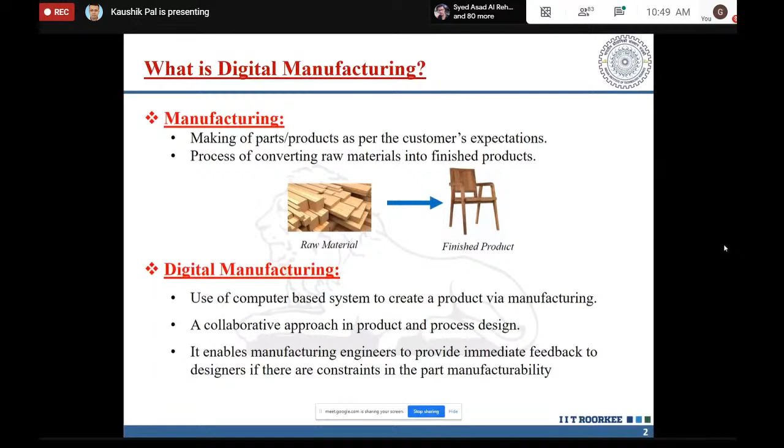So now what digital manufacturing allows for: first is shortening of the development time and cost. Yes, because when you have human interventions, there is a chance of error, since in industry generally after 8 or maybe 10 hours we change the operators, and all operators don't have the same capability or the same patience.

So after a certain time they may get exhausted and some error may occur, maybe in measuring length, height, width, or something like that. So there is a chance of error at every step, but when one machine is doing all these things, it performs that duty very properly, and after certain time it will never get exhausted.

So what will happen if it is finding any kind of drawbacks? Simple, it will give input to the operators that there is a certain problem, then human intervention will come into the area, look, rectify it, and then again the machine will perform the same thing.

So automatically it is reducing the time, and of course reducing the cost too, because at the initial stage when you are installing these machines, it is very costly and expensive, but that machine can work for 5 years or 10 years. If you calculate the cost of your operator for 5 or 10 years, you will see the profit is there when using digital manufacturing rather than employing so many operators.

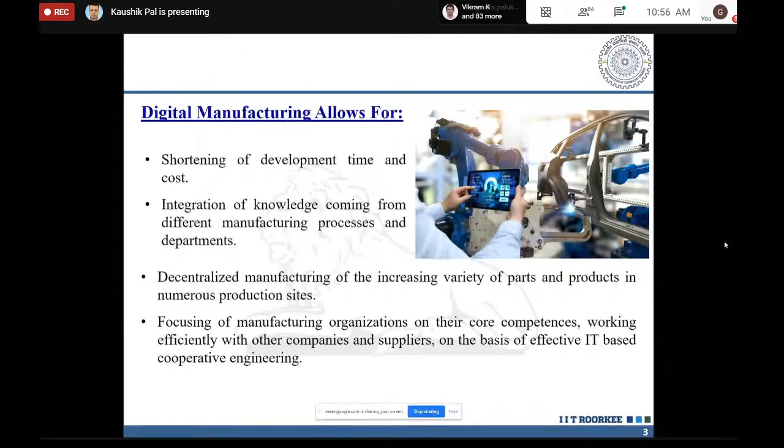Now, what are the basic components of digital manufacturing? There are several components available. First is CAD, which is nothing but computer aided design.

Basically, you are making any kind of design through software - AutoCAD, or there are n number of others like CATIA, AutoCAD. Nowadays MATLAB is booming too. So many types of software are available in the market, and you make the whole design.

Nowadays you have probably heard about 3D printers too. Earlier, it was only available for polymer kind of things, but nowadays it's available for metal kind of things also - metal 3D printers have already come into the market.

So now you can understand - suppose you are making a design, doing some kind of programming, and automatically that 3D printer will print that particular part. You simply take it out and put it in place. Now you can understand how automation, artificial intelligence and machine learning have come very close to us, and how helpful they are to us.

Next is CAM, computer aided manufacturing. Then CAPP, computer aided process planning, which we generally use in industry. You may have heard about Industry 3.0, Industry 4.0 - there are so many things.

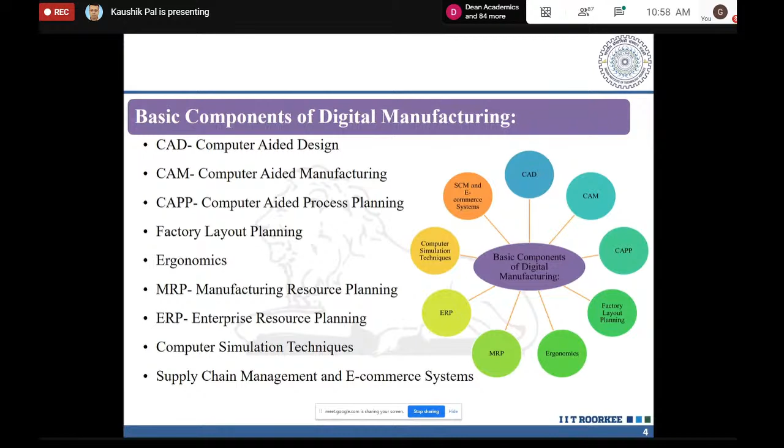Next, let us discuss CAD. From a mechanical point of view, we know what CAD, or computer-aided design, is. But for your remembrance, I am telling you: it is the use of computers to aid in the creation, modification, analysis, and optimization of a design.

CAD is not only about designing something new. Suppose you have any existing products - you can also replicate them in your software, then analyze the life of that product, find where the problem is if some portion has worn out or broken, and easily rectify those problems, repair and resolve them, and use that part for the future too. No need to throw it out.

So CAD software is used to increase the productivity of the designer, improve the quality of design, improve communications through documentation, and create a database for manufacturing.

Yes, of course. Earlier days also we are facing certain problems, and nowadays also so many. Suppose if you are going to any shops, I can give you examples. Suppose you are going to any shops, or maybe any industry, or something like that, or maybe some restaurant. So everybody has faced this problem.

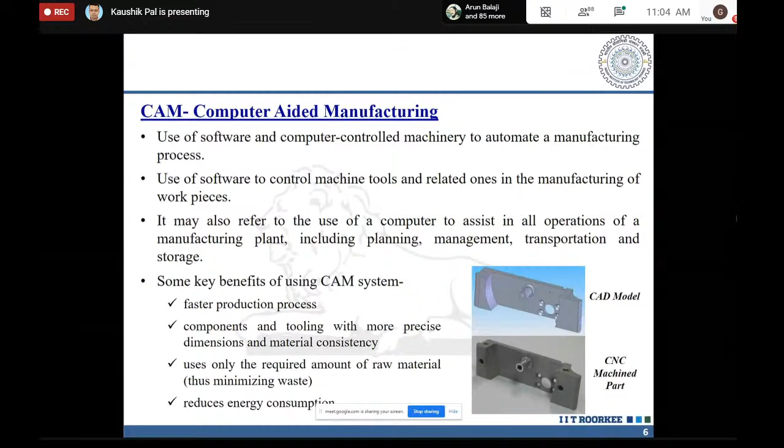So what will happen in that particular case? Just a minute, what is happening?

Okay, so what is there? Let me explain.

CAM is basically the components and tooling with more precise dimensions and material consistency. It continuously makes the same component several times, using only the required amount of raw material. Manually, we don't know how much material is required, or when welding, we may deposit more material than needed, causing wastage. This reduces energy consumption.

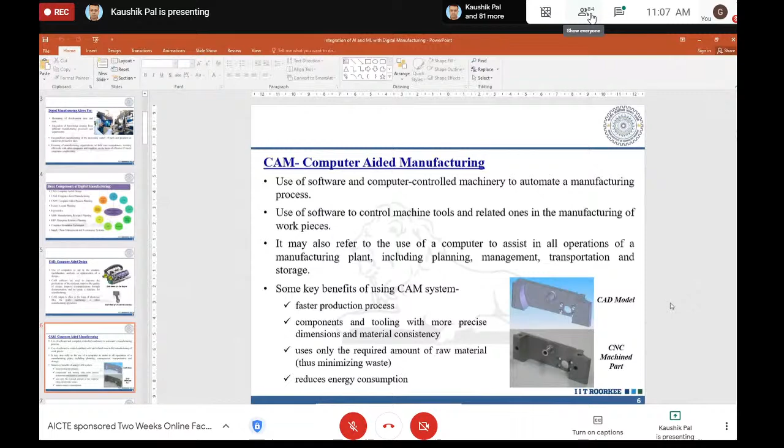It automatically controls your input parameters. Suppose in some cases you don't need that much heat or temperature, so automatically it will cool it down. Or in some cases it needs more load or more pressure, so automatically it will comply with all these things. These are all the beauty of digital manufacturing.

Next is CAPP, computer-aided process planning - the use of computer technology to aid in the process planning of a part or product in manufacturing. CAPP is the link between CAD and CAM. It provides for the planning of the process to be used in producing a designed part, because for any process you need proper planning.

Due to that, it will automatically give you the time - if you go by this particular route, it takes this much time. This is like how GPS software works, like Google Maps, which gives you two or three types of options. If you go by this route there's some traffic and maybe a roadblock, it needs 4 hours. If you go by this route, it has faster traffic but has some tolls. All this kind of information.

The machine gives you the same kind of information - if you go by this method, it will take this much time, maybe this much complexity may occur. Based on that, you can choose your best option.

Then factory layout planning: design assembly lines, equipment and tool requirements in a 3D environment. It will not only tell you the fastest method, but also how to position your equipment, in which zone and where, so everything is nearer and easily reachable, without harming any other operations. Everything will be done continuously and finished.

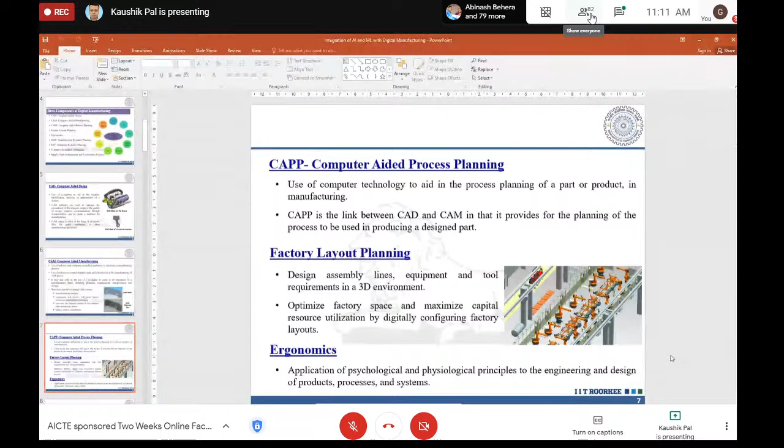So as I told already, when you are having some dead end, it will give you some solutions. Dead end means the machine will automatically give you the solutions. If you go by this way, you can be able to reach your goal, or you can do it like this. So automatically it will plan properly. It will tell you exactly that particular process by which you can gain.

And not only that, it will save the life of that particular equipment, because sometimes it may happen that some machines need constant monitoring. So you have to employ certain employees over there at that particular time who will look into those machines constantly. Say, suppose I can give you an example.

Suppose you are going for any kind of automotive industry, or maybe a bearing company. So they are making that product within a minute. After certain minutes or hours, you have to check the products, whether they are proper or not, if you do it manually. But when you are making it digitally, of course the checkpoint is there, but that checkpoint is also taken care of by your equipment itself.

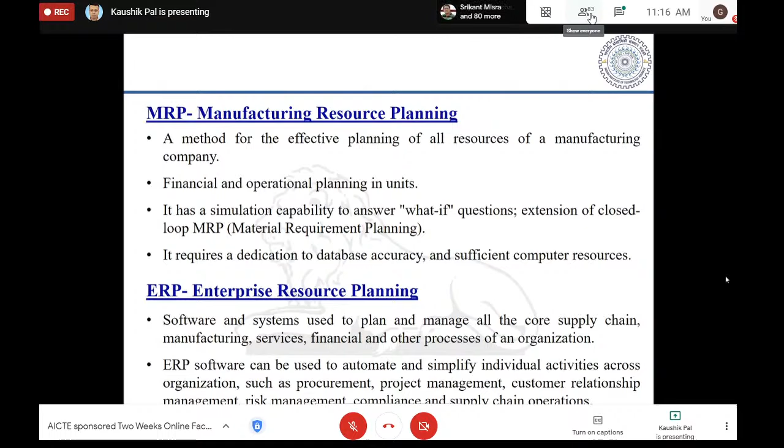Nowadays so many simulation tools have come. MATLAB is there, ANSYS is there. Suppose you are making one material and hitting it, raising the temperature and all these things. You have a metal bar and you give it a temperature of around 600, or maybe 1200, or 2000 degrees centigrade. After giving the temperature of 2000 degrees centigrade, how that particular material behaves is also given by our simulation techniques.

So in ANSYS, I put in all the parameters, setting the temperature around 2000 degrees centigrade. After 2000 degrees centigrade, whatever load or thermal stress is generated, how the metal will behave, how the temperature will be distributed inside the metal - everything will be given by that particular software.

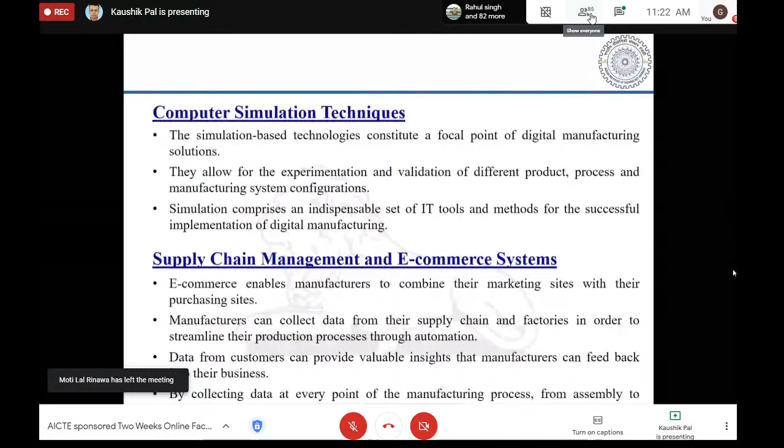I was giving the example of the 3D printer. Nowadays the 3D metal printer has also come into the market, but it is huge cost. If you are able to put it into your industry, you can automatically get the output. Then, along with machining and tooling information.

It reduces commissioning cost through simulations by validating robotics and automation. It helps in creating factory models faster and ensures they are operating under optimal layout, with material flow and throughput before production ramp up. Whatever I have explained to you, everything has been given point by point.

It supports Six Sigma. Nowadays Six Sigma has come, Lean Initiative has come, and green manufacturing, basically you can hear about the green composites or green manufacturing process. These are all things within a graphical environment to analyze dimensional variation. It facilitates the sharing of quality data across your organization by generating complete, verifiable CAD-based machine inspection programs for CMMs and NC machine tools. It executes production processes with real-time access to lifecycle data.

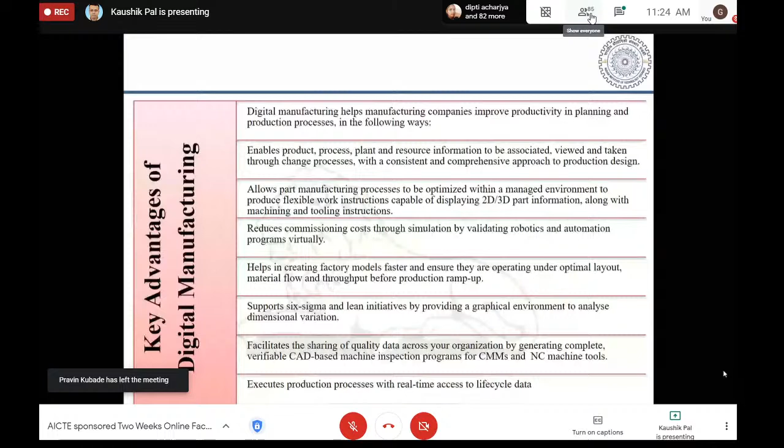So this is basically the whole key advantage we can get with digital manufacturing. Now, manufacturing equipment in DM, digital manufacturing. I can give you certain examples: first is numerical control and computer numerical control machine tools, automated welding machines, industrial robots, and coordinate measuring machines. I'll show you some examples, images, or videos, so you can understand how digital manufacturing is helping nowadays in our industry and in our day-to-day life.

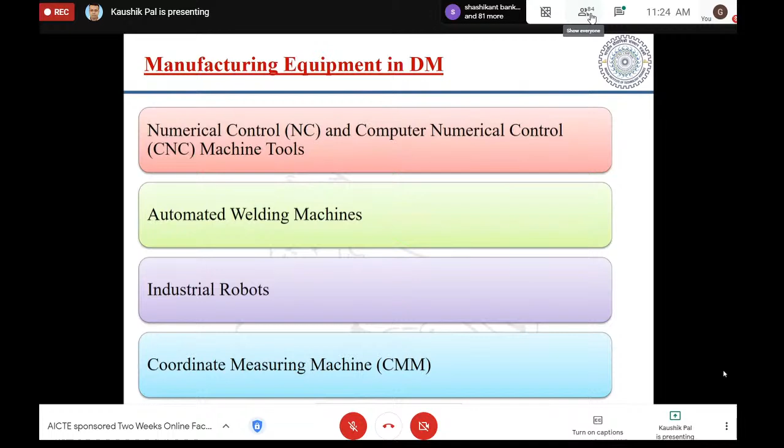First, when talking about numerical control, this is not a new technology, it was developed quite a long time back. Sometimes we call it computer numerical control or numerical control. NC-CNC is the automated control of machining tools such as drills, lathes, and mills. You do the programming and put it into your computer, which performs operations one by one. It will decide whether the drill, lathe, or mill is required, and you will get the final product.

Sometimes you have to tell it the steps also. A CNC machine processes a piece of material like metal, plastic, wood, ceramic, or composite to meet specifications by following coded programmed instructions. Earlier, we used certain kinds of chisels or a simple hacksaw, but nowadays everything is done by the machines themselves without a manual operator directly controlling the machining operations.

The program can be written by a person, or more often generated by CAD or CAM software. So the machine should be able to learn your language. For learning that language, you need certain software, because computer only understands 0 and 1, it doesn't know anything else. So I have to give it certain things the computer can understand, and this kind of software is the interface between your machines and human beings.

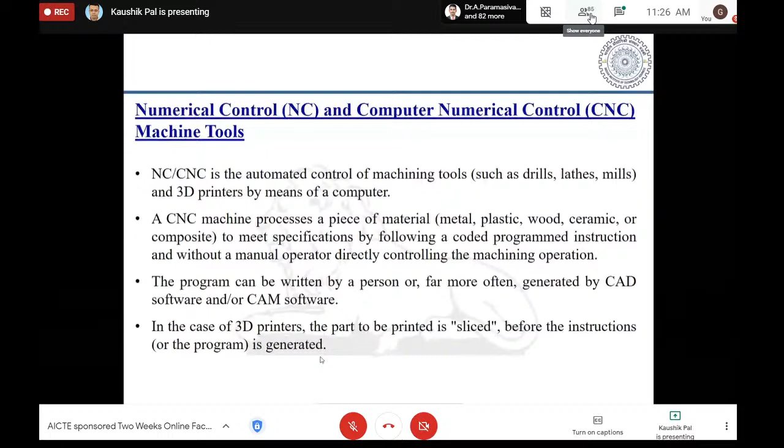In the case of 3D printers, the part to be printed is sliced before the instruction or program is generated. Sliced means you have to give some pause or break, so one process will be done and then it will move to the next process, stop, and then move to the third process. This is how the operations take place.

Now I can show you an example of how this machine works, basically the CNC lathe. So now everything has been given into the software, there is no manually operated process anymore.

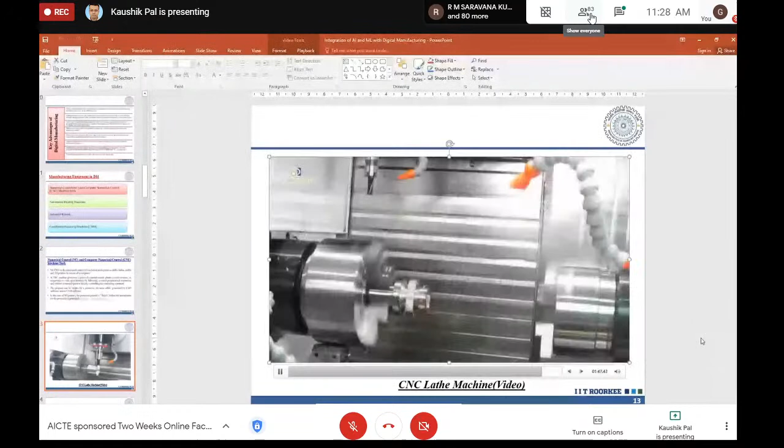Now you have seen how the machine performs these tasks. Similarly, we also have automated welding machines that help automate the welding process. It changes input parameters, heat, and if you are using consumable electrodes, after one finishes, it automatically loads a new electrode and continues the process. Sometimes it may not get continuous heat or pressure, in which case the machine automatically stops.

So that means you always have feedback from your machine. If you face any kind of obstacle along the way, feedback comes in, then you rectify the problem and proceed to the next step.

So many welds can be handled quite adequately by an automated welding process. Fully automatic welding removes the human element except as an overall observer to make sure the machines are running properly. That means you keep an eye to see whether all operations are okay. Suppose you want to weld 5 parts and previously needed 5 operators, now simply from a table you can observe how all the welding takes place without any operator.

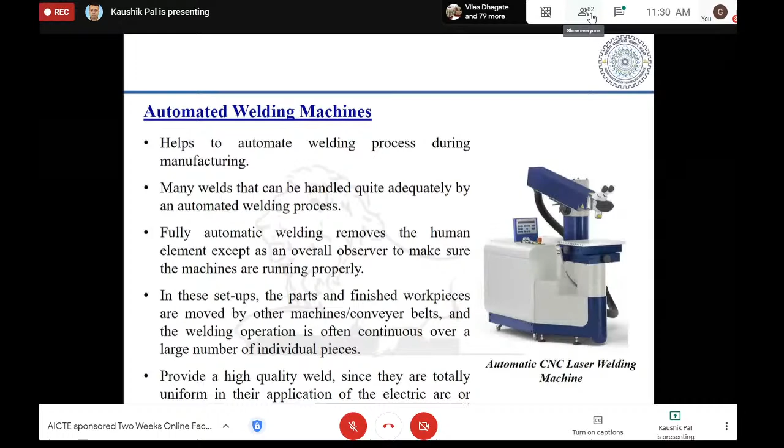Next, industrial robots. We generally see this kind of robot in movies or elsewhere, but nowadays they have come into the market. You cannot find any kind of operator there. Everything, including the computer monitor, is taken care of by the robots themselves, which is the interesting part. You give instructions only to one particular robot, and that robot gives instructions to all other robots, and the task gets done.

So maybe in the future we won't be surprised that a car is being made while you sit at home, with the entire company run by these kinds of robots, and your car gets dispatched, from flat sheet to final product. Who knows, maybe in the near future we can see all these kinds of things.

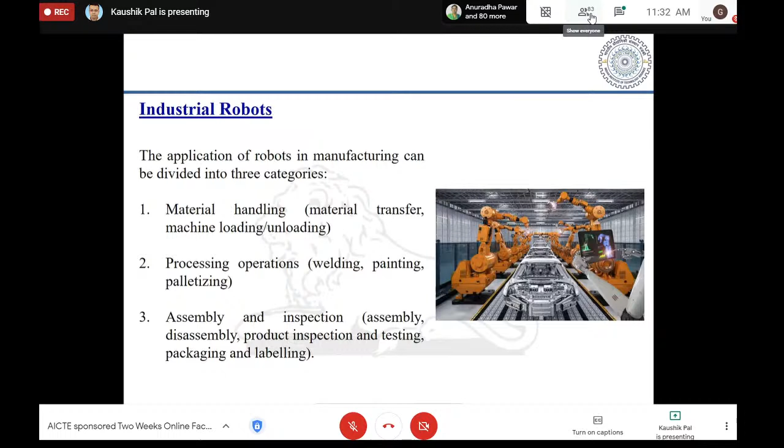The application of robots in manufacturing can be divided into 3 categories. First is material handling, like material transfer, machine loading and unloading. Second, processing operations like welding, painting, palletizing, assembly and inspections. Third, like assembly, disassembly, product inspections and testing, packaging and labeling.

Next is CMM, the coordinate measuring machine, which I was talking about. I've given you only a single example, but there are numerous examples by which you can check your parts. You can check height, surface properties, textures, width or dimensions, and measure surface roughness. Everything can be measured, including whether any hole you make has a uniform diameter or not.

A coordinate measuring machine is a device that measures the geometry of physical objects by sensing discrete points on the surface of the object with a probe. Various types of probes are used in CMMs, including mechanical, optical, laser, and white light.

Depending on the machine, the probe position may be manually controlled by an operator or it may be computer controlled. So that means basically everything you are controlling by sitting at the computer.

I can give you another example. Suppose you are traveling and going to the airport. You are keeping your bags on the scanner. The scanner belt is continuously moving, and only a single person is sitting over there. What is he doing? He is seeing what is there inside your bags.

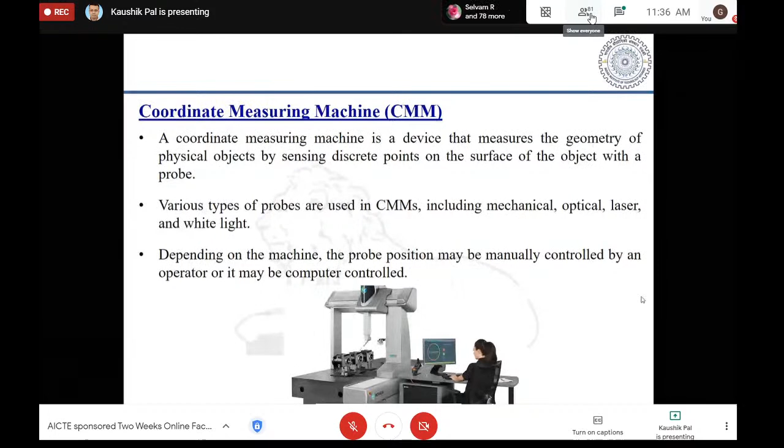If something is wrong, then only the human intervention will come. So now everything has been digitized, and manual intervention has been reduced. Our planning is to reduce this manual intervention as much as we can. But of course, that has some pros and cons, which I am going to talk about in tomorrow's lecture.

Next, basic introduction of artificial intelligence. Now let's come to artificial intelligence. Till now we were talking about digital manufacturing. Artificial intelligence as an academic discipline was founded in 1956. Now you can understand it is not so new.

The goal then as now was to get computers to perform tasks regarded as uniquely human things that required intelligence. That means till now the computer was working depending upon your input parameters. If you say go, then go. If you say no, that means no. But now when I am talking about artificial intelligence, that means the computer has brains. It can take its own decisions. If this path fails, automatically it will take another path and achieve the goal. So it's basically like the mimicry or cloning of the human brain.

Computers emulate the human thought process. AI means getting a computer to mimic human behavior in some way. The computer is doing something intelligent, so it's exhibiting intelligence that is artificial. Yes, of course, that is the artificial thing.

So the earlier use of AI was in image recognition. You can understand this with Google nowadays. Suppose if you use certain Apple products, say an iPad or an Apple MacBook, there is a Face ID feature. Unless you click on Face ID, at the first instance it will click your face image and it will be digitally saved. Every time you open it, it will take your face image, match it, and then it will open. If it is handled by some other person, it will never open. So that means the image recognition kind of thing has already taken place.

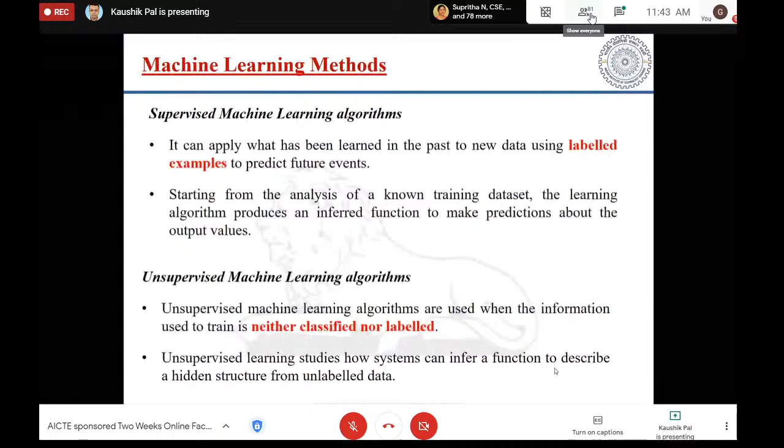Unsupervised machine learning algorithms are used when the information used to train is neither classified nor labeled. Unsupervised learning studies how systems can infer a function to describe a hidden structure from unlabeled data.

Then semi-supervised machine learning algorithms fall somewhere in between supervised and unsupervised - using both labeled and unlabeled data. It typically uses a small amount of labeled data and a large amount of unlabeled data.

So it is a mixture of things. Then reinforcement learning means you are putting a third party into the system. Reinforcement machine learning is a method that interacts with its environment by producing actions and discovers errors or rewards. Trial and error search and delayed reward are the most relevant characteristics of reinforcement learning. It allows machines and software agents to automatically determine the ideal behavior in a specific context in order to maximize its performance.

Some common applications of AI include personalized coupons or product suggestions we receive after shopping online, AI-based self-parking or self-driving cars like Tesla. If you know about Tesla cars, they automatically take their own decisions about traffic, where to stop, and what the speed should be in traffic. Other examples include virtual assistants like Siri and Alexa, social media news feeds, chatbots, trading and investment, and traffic management, etc.

Now, what is the role of artificial intelligence in general? Artificial intelligence in modern terms generally refers to computer systems that mimic human cognitive functions. It encompasses independent learning and problem solving. Most contemporary artificial intelligence projects are currently better understood as types of machine learning algorithms.

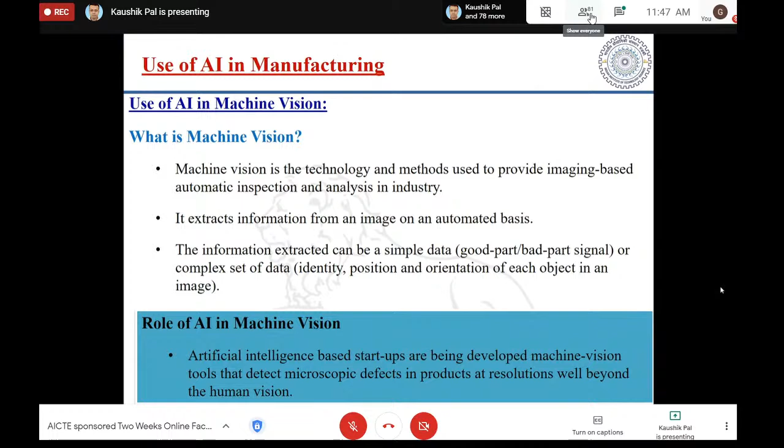Role of AI in machine vision: artificial intelligence-based startups are developing machine vision tools that detect microscopic defects in products at resolutions well beyond human vision, meaning defects we cannot see with our naked eyes, but which can be seen by computers or machines. This helps save costs for the future, because when faulty parts are put in, problems may occur later. So by using this computer or machine vision, you are diminishing those particular errors or losses.

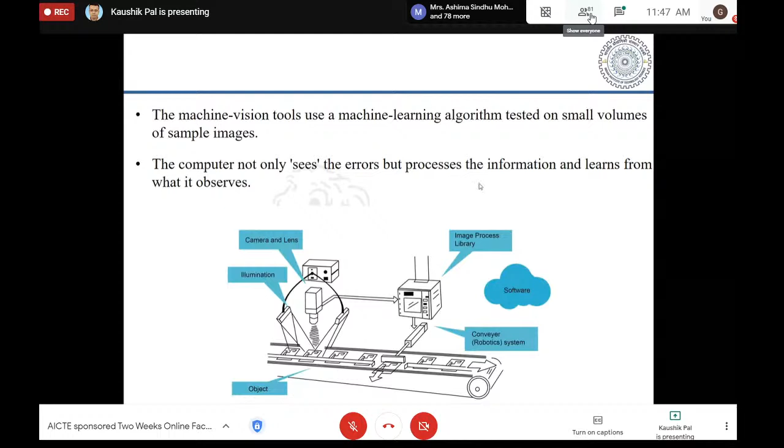The machine vision tools use a machine learning algorithm tested on small volumes of sample images. The computer not only sees the errors but processes the information and learns from what it observes.

Then there's automation in manufacturing with the use of AI. In 2014, China, Japan, the United States, the Republic of Korea, and Germany together contributed 70% of the total sales volume of robots, so everything is automated. In the automotive industry, a sector with a particularly high degree of automation, Japan had the highest density of industrial robots in the world at 1414 per 10,000 employees. Now you can understand, even though employees are there, they are still using robots just to minimize human intervention and errors.

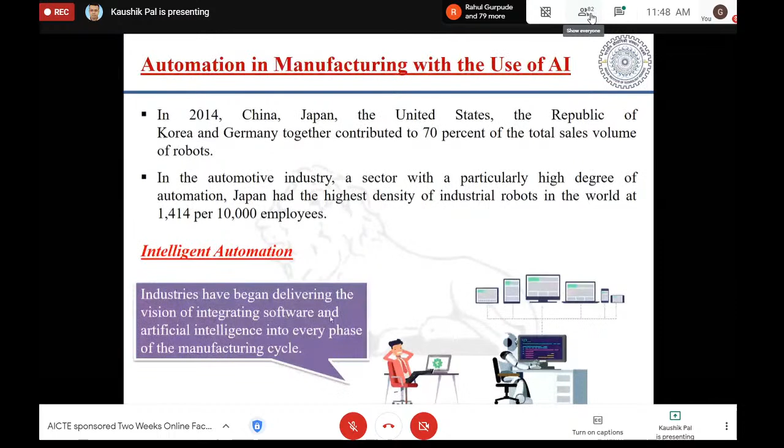Industries have begun delivering the vision of integrating software and artificial intelligence into every phase of the manufacturing cycle. This includes the generative design approach in manufacturing, where designers or engineers specify design goals as well as material parameters, manufacturing methods, and cost constraints.

I have already explained this in detail, so I'm not going into the details once more.

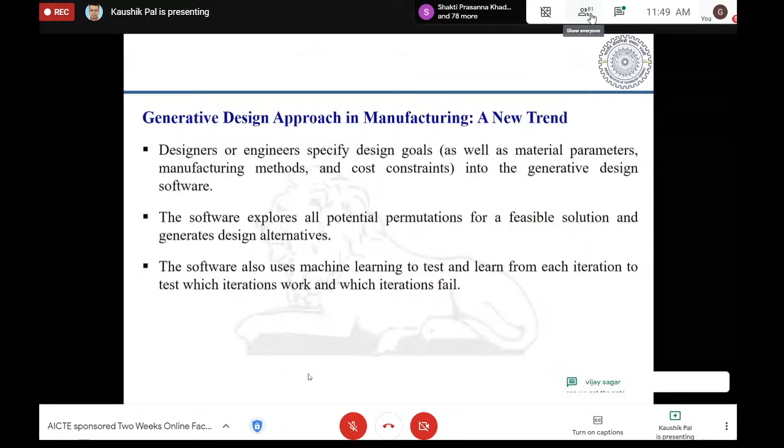Into the generative design software: the software explores all potential permutations for a feasible solution and generates design alternatives. The software also uses machine learning to test and learn how each iteration performs, across however many cycles, so it is taking the final call. It's not going for a single one, there are so many iterations. Only after that will it give you the final result, showing which iterations work and which iterations fail.

AI and ML in robotics. Artificial intelligence is set to disrupt practically every industry imaginable, and industrial robots are no different. The powerful combination of robotics and AI or machine learning is opening the door to entirely new automation possibilities. These are all things we are seeing in so many videos and movies.

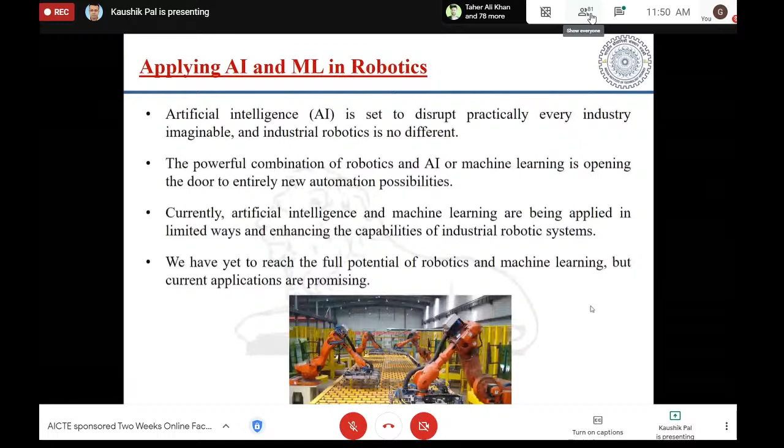Currently, artificial intelligence and machine learning are being applied in limited ways, enhancing the capabilities of industrial robotic systems. We have yet to reach the full potential. We have not totally changed into robotic systems. So now we are in a phase in between, with 50% human intervention and 50% robot. But current applications are promising.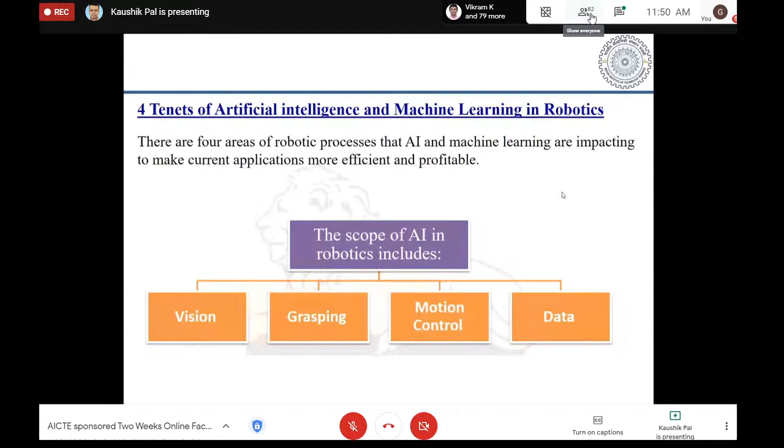Now, the tenets of artificial intelligence and machine learning in robotics. There are 4 areas of the robotics process that AI and machine learning are impacting to make current applications more efficient: vision, grasping, motion control, and data. In these 4 zones, AI and machine learning are boosting the robotic process.

What is vision? AI is helping robots detect items they have never seen before and recognize objects with far greater detail. In some foreign countries, for the immigration process, you no longer need to show your passport. There's just a machine with cameras, no persons. You put your eyes over there, it scans your retina, and if it matches the data, the door opens automatically. If there's a problem with your data, the gate will never open.

So that's vision. Then grasping. Robots are also grasping items they have never seen before with AI and machine learning. Simply, use the camera in your mobile phone. When you take a new picture, nothing happens, but if you already took a picture of a person, say your kids or your spouse, and you try to take the same person's picture again, you'll see a square box appear.

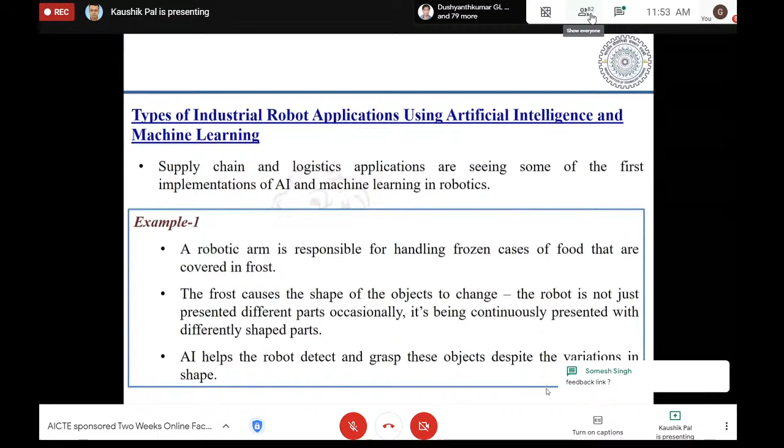The frost causes the shape of the objects to change. The robot is not just presented with different parts occasionally, it is continuously presented with differently shaped parts. AI helps the robot detect and grasp these objects despite the variations in shape.

Example 2: picking and placing a large volume, which is not possible by humans, of different part types in a warehouse. This volume of part types would not be profitable to automate without machine learning. But now engineers can regularly feed robots images of new parts, and the robot can then successfully grasp these part types.

They take those images and store them inside. When a new item comes in, they first match it against the stored data. If matching is successful, they can perform the same task. If matching is not successful, then you have to feed that particular data again, and this way increase the database of that particular equipment.

AI and machine learning will have a transformative impact on industrial robots. While these technologies are still in their infancy, they will continue to push forward. Yes, of course, they are at a very early stage, so they need time to mature. But in the near future, it will come.

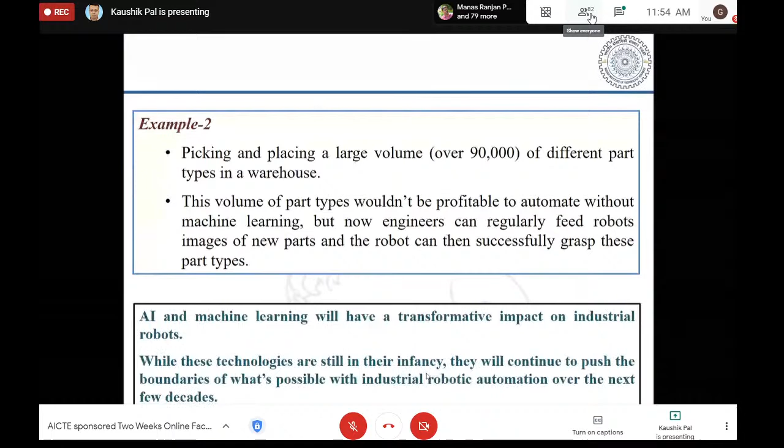What is the advantage of integrated AI and ML with digital manufacturing? AI-driven machines ensure an easier manufacturing process along with many other benefits at each new stage of advancement. Technology creates new potential for task automation while increasing the intelligence of human and machine interaction.

Some benefits of AI include directed 24/7 production. Even if you call any call center, now it is all 24/7, automatically your machine is giving the answer. Whatever query you have, the machine is solving those problems. No need to put an operator at 24/7. So automatically you can understand that whatever the service, it is more wide open, it is getting easier. So everything is now very close to us.

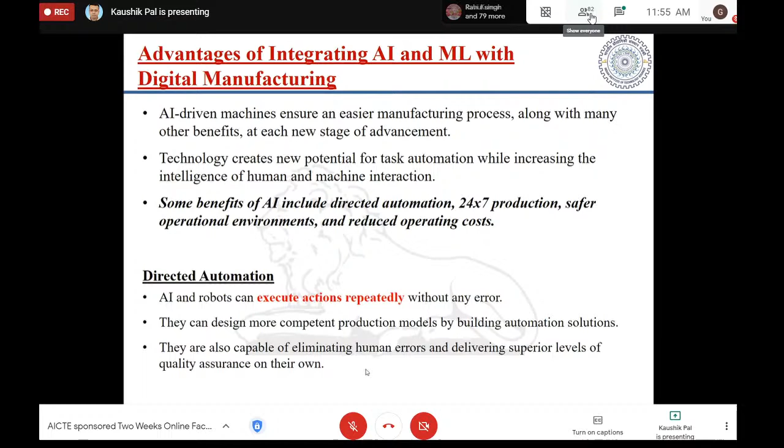Safer operational environments and reduced operating cost. Directed automation, AI and robots can execute actions repeatedly without any error, so continuously it can perform. They can design more competent production models by building automation solutions. They are also capable of delivering superior levels of assurance on their own.

24/7 production, as I told already, so continuously the machine is working. Safer operational environment, of course, few human laborers are performing, so it is not too dangerous. Chances of accidents have been reduced. Human interaction has been reduced. Losses due to error have been reduced. So these are all the benefits.

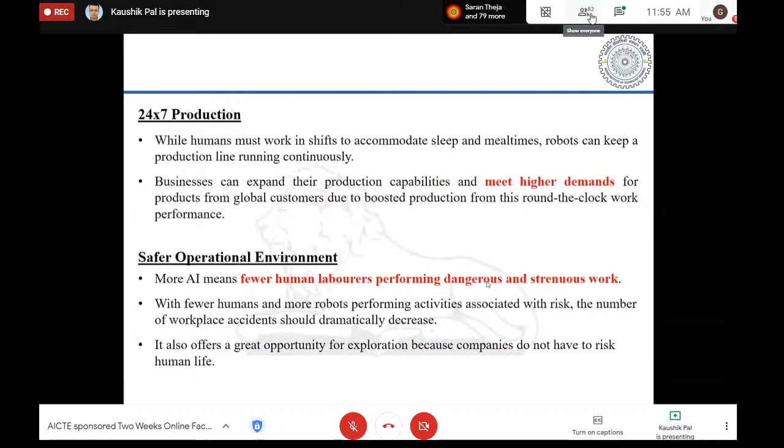Operating cost, of course, overall operating cost will reduce when you are reducing wastage, reducing energy input, reducing manpower involvement. These environmental impacts, yes, of course, it is safer, it is making certain kind of green, fossil fuel consumption and greenhouse gas emissions have been reduced. So now the computer is doing it, the robot is doing it. So these are all the things.

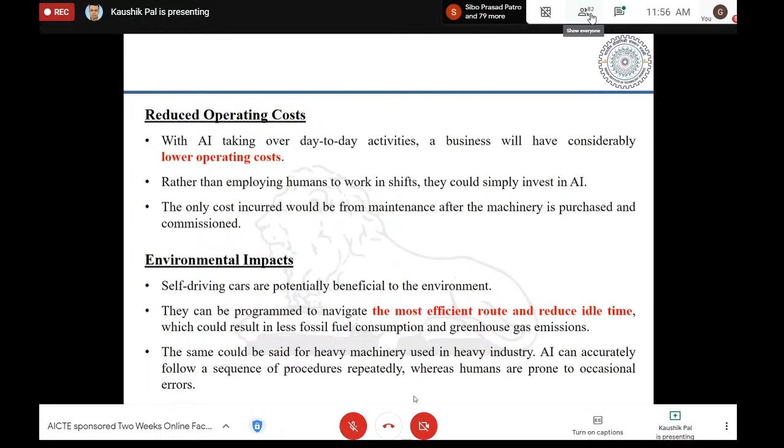Additional benefits: AI and industrial automation have advanced considerably over the years. There has been an evolution of many new techniques and innovations, such as advances in sensors and increase of computing capabilities. It also helps to make quick data-driven decisions, advance process effectiveness, minimize operational cost, facilitate product development, and enable extensive scalability.

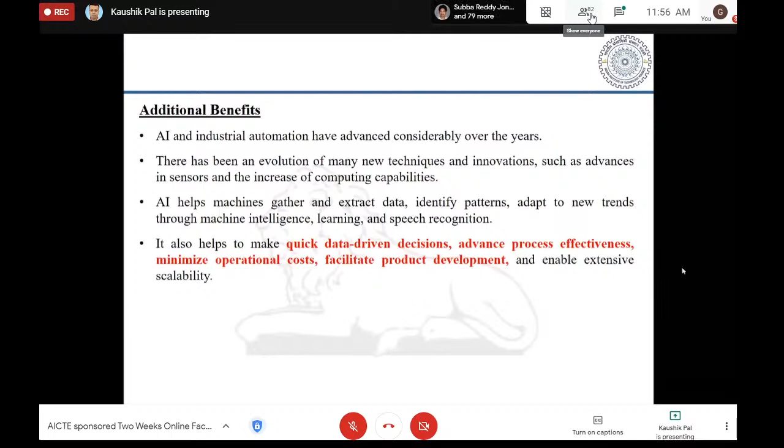Of course, there are certain disadvantages too. High cost is one, at least initially. Though the cost has decreased in the past few years, individual development expenditures are still very high for basic AI. Small businesses with low capital investment may have difficulty. For larger companies, the price of AI may be higher depending on how much AI is involved in the process.

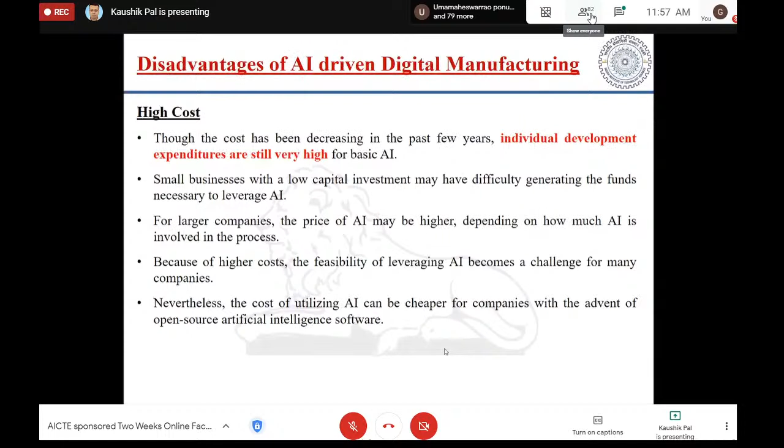When you are increasing the percentage of AI involvement, automatically the cost will increase. Because of higher cost, the feasibility of leveraging AI becomes a challenge for many companies. Nevertheless, the cost of utilizing AI can be cheaper for companies with the advent of open source artificial intelligence software.

Reduced employment opportunities - yes, of course, because you are reducing manpower, jobs might be lost because AI would replace them. Any job that involves repetitive tasks is at risk of being replaced.

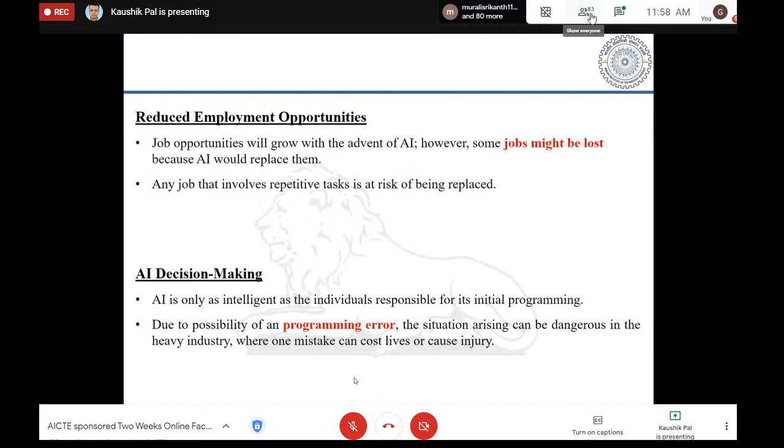AI decision making - yes, there may be a chance of programming error, a coding error, or maybe sometimes in between operations the computer has stopped or crashed or something like that. So these can occur. These are all the drawbacks of AI.

Environmental impact: electronic waste is expected. Yes, of course, since you are using an increasing number of computers, automatically the UPS units, mouse, keyboards, machines, robots, and plastic products are increasing. That is creating some kind of environmental impact at the time of disposal, or maybe after using it. They are not always recyclable.

AI trained to act on environmental variables might have erroneous algorithms which can lead to potentially negative effects on the environment. Yes, of course, it is not only that we are totally dependent on humans, but also on machines.

Now let me tell you an example also. There are very few people who, if I ask their own mobile number, will be able to tell me, because they never dial their own number on their own mobile. So probably they have forgotten. Also, earlier days when we had the normal phone in our house, we could remember at least 15 to 20 numbers of relatives and neighbors. Now if I ask you to tell 5 mobile numbers of others, probably you can't say, even I can't. So basically, now everything is machine oriented. We are totally depending upon this kind of software and digitization, so automatically our memory loss is also taking place.

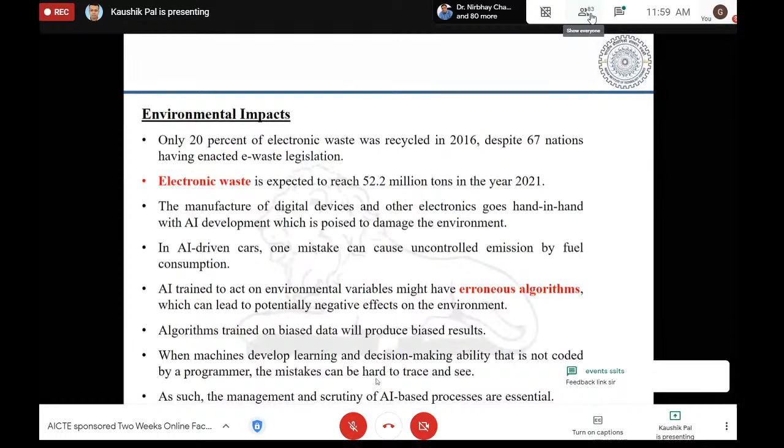When machines develop learning and decision-making ability that is not coded by a programmer, the mistakes can be hard to trace and see. As such, the management and scrutiny of AI-based processes are still essential.